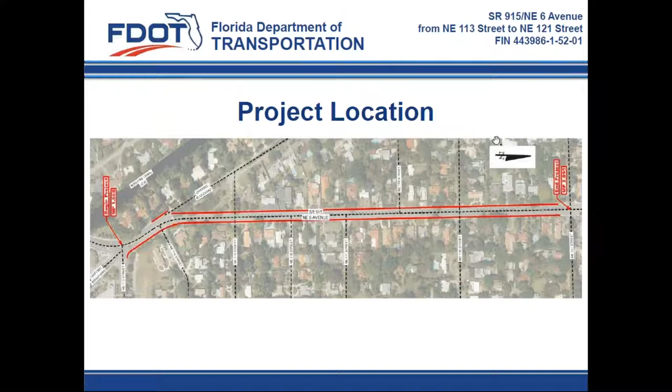A brief background of this project: In April 2018, the Village of Biscayne Park's previous commission and manager requested FDOT to add sidewalk within this corridor. A study was initiated which determined the feasibility of this project. Back in 2019, the Village of Biscayne Park also requested to upgrade the deficient lighting system along the corridor. FDOT approved this scope and determined that they will only cover the cost of conventional lighting, and the village is to cover the cost difference for decorative lighting.

As a result of all the previous coordination and requests, the scope of the project includes new sidewalk along both sides of the road within FDOT right-of-way, new lighting system to replace the current deficient one, incidental drainage improvements due to the sidewalk addition, the upgrade of crosswalks and pedestrian signalization features at the Northeast 113th Street intersection, and also landscape modifications within the FDOT right-of-way.

Some relevant dates and milestones for this project: the design was initiated in November 2019. The letting date is scheduled for July 2021. The construction start date is scheduled for November 2021. The end of construction date is scheduled for June 2022. And the cost of construction is approximately $2.6 million, which includes the cost difference for decorative lighting.

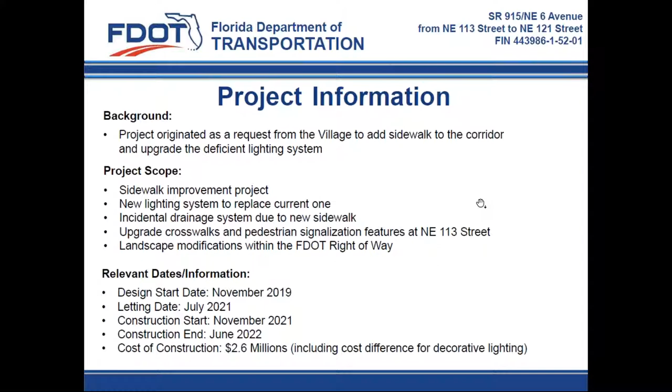Our project will maintain decorative driveways. The new sidewalk will connect to the existing decorative driveways at the approaches of the driveways.

There are also several landscape encroachments within the FDOT right-of-way. Our team, led by the FDOT Property Management Office, will coordinate with each of the individual property owners for the relocation or removal of these encroachments.

License agreements also will be required at some properties where the proposed back-of sidewalk or driveway needs to be harmonized. Our right-of-way office team will also coordinate with the residents that require to sign these license agreements.

Our maintenance of traffic was designed to avoid any nighttime work and is going to provide at least one travel lane open in each direction at all times. Access to properties will remain. Any temporary driveway impact due to drainage installation will be closely coordinated with the property owner during construction.

And finally, the FDOT is to enter into a locally funded agreement with the Village of Biscayne Park to cover the cost difference of $400,000 for decorative lighting. Otherwise, conventional lighting will be provided and fully covered by the FDOT. The decorative lighting was closely coordinated with the Village Public Works Office since the project design started.

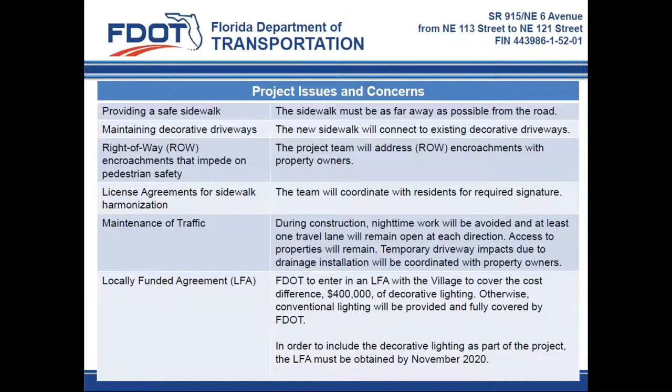With this, Mehar, our lead roadway engineer, is going to go more into the technical portion of the project. Mehar?

Thank you, Hans. Hans has covered a lot of the things that I will be covering. However, I'm going to be focusing in and showing you guys from an aerial perspective the roadway improvements that will be proposed. As he mentioned, there's going to be some crosswalk improvements at 113th Street.

Currently, there's only one crosswalk along the south side of the intersection. As you can see here in the picture, we're adding crosswalks on all legs of the intersection, so that's definitely an improvement to the area. In addition, we're going to be adding new striping, and we're going to be adding ADA features such as the curb ramps and the pedestrian signals.

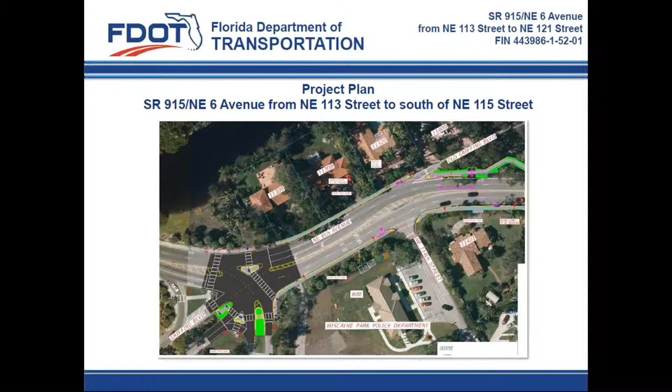As you see here in the light shaded gray on both sides of the roadway, we are proposing the sidewalk. For safety reasons, we're going to be placing the sidewalk as far back up against the right-of-way as possible.

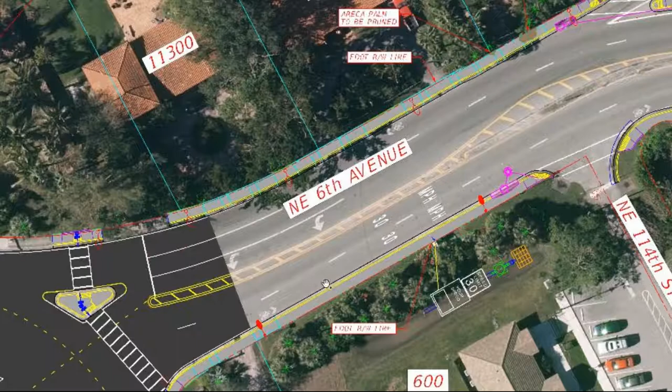As we go through the project, you will see different colored symbols that will show you different features of the roadway. For example, here on the right side, we have a roadway lighting feature that will be placed. On the other side of the roadway, you'll see another symbol that shows you a different kind of lighting feature, and we will cover that later on.

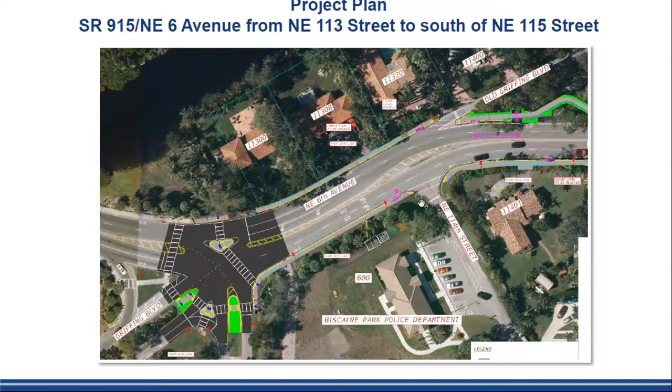We'll also show in a light purple color the drainage system that will be added to the project to mitigate any runoff because of this added sidewalk. As you see here, driveways were added at different locations of the project, obviously to maintain access to the properties.

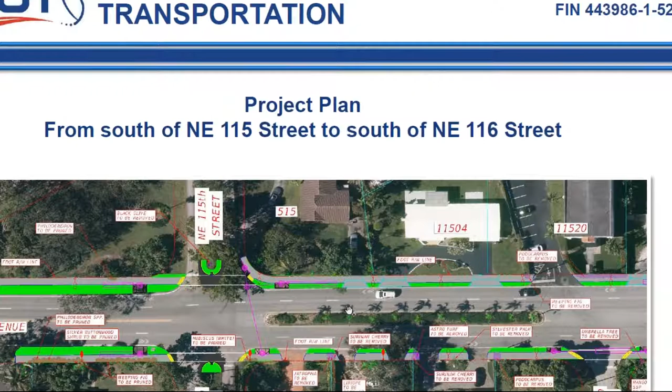At some locations where we have decorative driveways, we refrained from modifying or touching these driveways. Our approach was to change the profile along the sidewalk to tie down to the existing driveways where possible. Obviously, the driveways had to meet certain criteria, one of which was the ADA criteria. In some locations, such as this one here, you'll see a gray driveway, which means that you're getting a new concrete driveway that will be tying into your property and to your driveway.

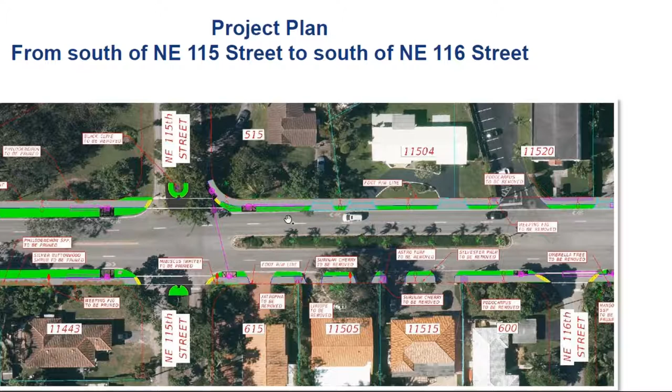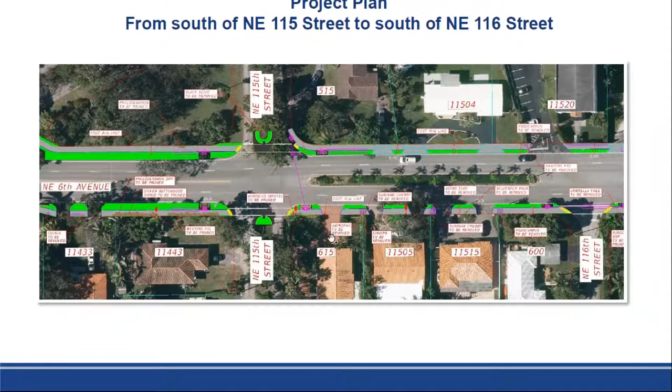As we go through the project also, please note that for safety reasons, we added a couple of pavement markings to remind drivers that this is a 30-mile-per-hour zone. We have placed one on the south side of the project, one just south of 119th, and one north of 119th intersection, and another one actually right at the end of the project.

Here's the 30-mile-per-hour pavement markings, again, to remind the drivers that this is a 30-mile-per-hour zone.

In addition to the sidewalk, we are placing a small swale, a 4-foot swale between the sidewalk and the roadway, to capture any runoff from the outside lanes and from the sidewalk and convey it into our system. A lot of these systems are small closed systems. They include French drain systems that will capture the water and convey it into the groundwater table.

And as we go through the project also, just to show you here, we're replacing the speed feedback sign, which is outdated as well.

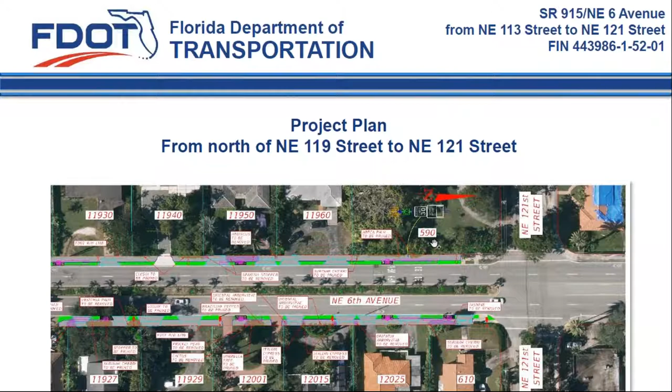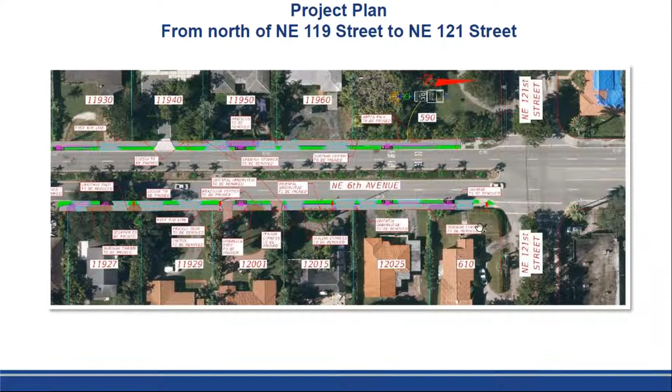The next slide is going to show you a visualization—we have a few visualization slides that show the daytime and nighttime feel of what the project's going to look like once it's completed.

Just south of 115th Street, we have the 6-foot sidewalk. A small portion of it has a curb and gutter adjacent to it, but as we go further into the project, the curb goes away, and we keep the flush feel to the project.

You also see a handicapped person in a wheelchair. That person is going to have access from the beginning of the project all the way to the end, with all the curb ramps we're adding.

In addition, next to the gentleman wearing the blue shirt, there's a decorative driveway that we are maintaining. The sidewalk will taper down, tie into that driveway, and pick back up on the other side.

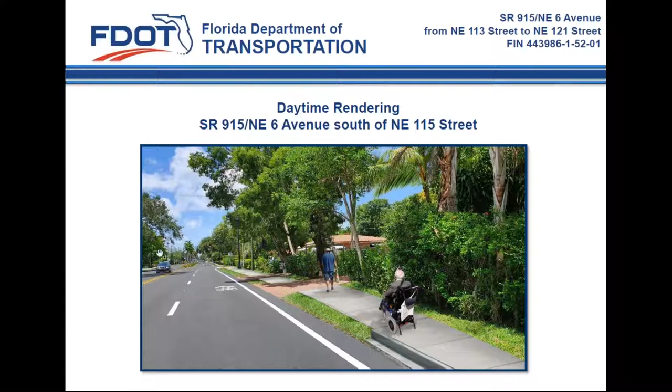You'll notice the different lights shown on both sides of the roadway. As we go to the next slide, you'll see the nighttime visualization—this is what it's going to look like during nighttime.

Let's keep in mind that these lights are meeting certain criteria as requested by the village. They also have to meet the DOT's criteria, obviously, and we'll get into more details about the lights later on.

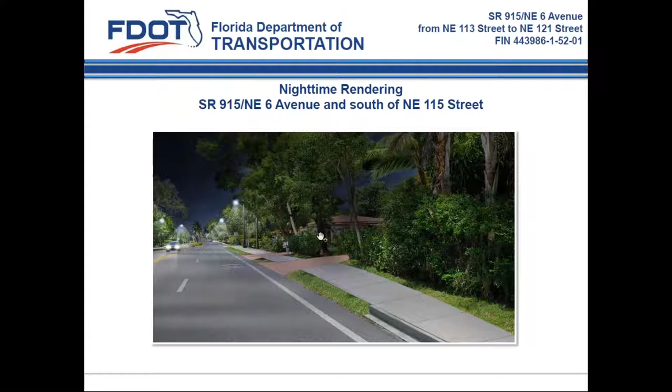In some areas, we will need, as Hans mentioned, license agreements to tie in. In other areas, we don't—it really depends on the property. And as Hans mentioned, you'll be contacted by the right-of-way folks when the time comes.

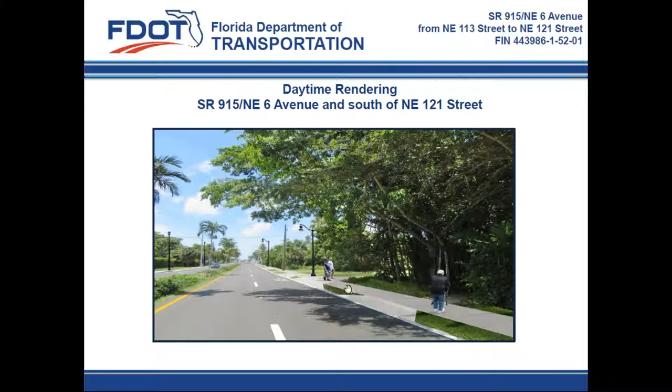As you see, there's a small swale on both sides. For clarity purposes, we didn't show the drainage in any of the pictures, just because it gets a little too complicated and too graphical to show.

As you see on the different sides of the street, there are different light poles. The reason for that is that on one side of the street you have overhead utilities, and on the other side you don't.

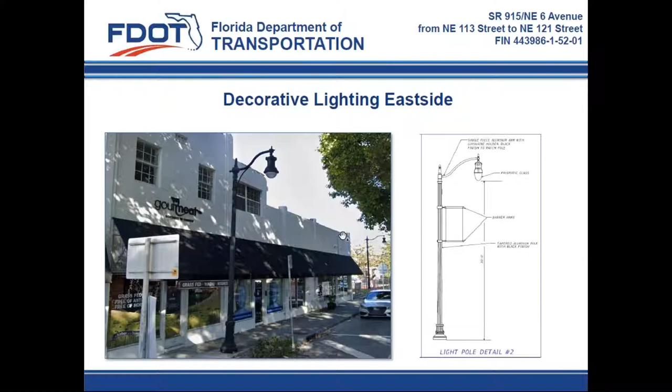The reason we chose this one on one side is that there's no overhead utilities. However, we chose the other one because of the overhead utilities, where we had to stay clear of them—as you see on the left side of the presentation, that light pole does have utilities over it. That's exactly the main reason why we used it.

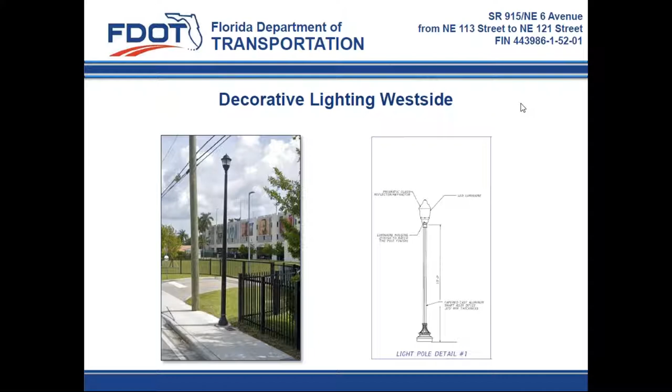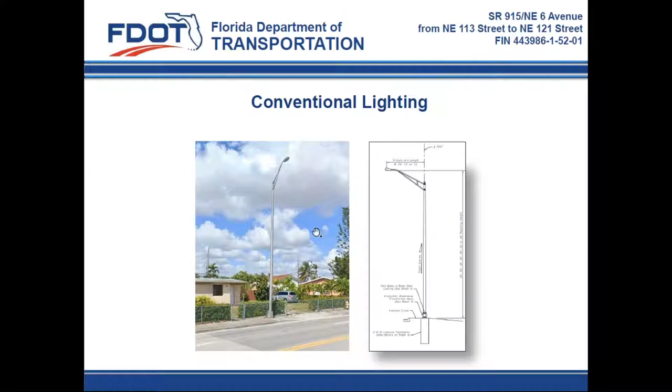If an LFA is not agreed on and not entered into, then we will be proposing the conventional lights, which you see throughout the city. This is a good example of what the conventional light will look like. And Rodolfo, I'll turn it back to you.

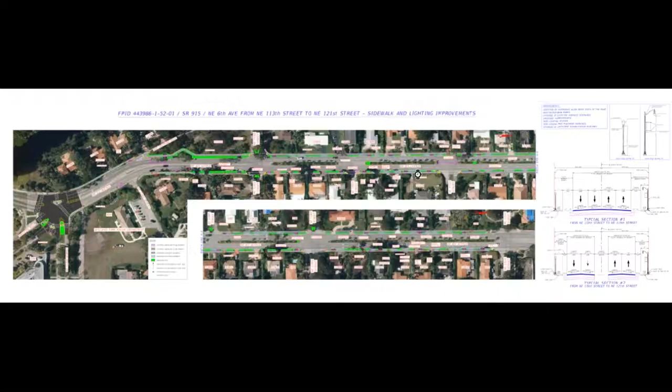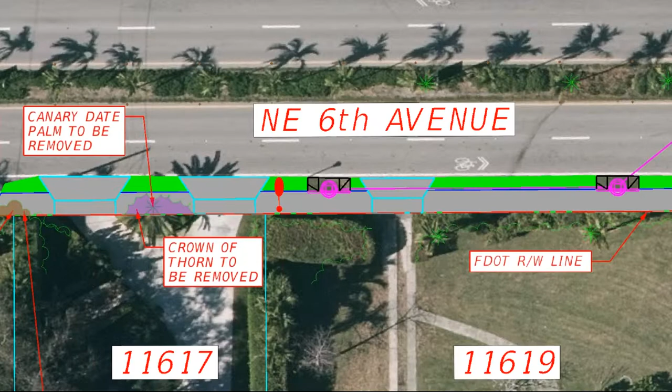Absolutely. I'm trying to look here—I'm going to jump down to something that's rather important regarding the rights of way. So you're now showing us that there are things in the right of way, that's your land, that has been encroached upon with plants, mailboxes, and other things. That right of way is 10 feet deep, although some residents are telling me their surveys indicate slightly otherwise. But regarding items in the right of way, now that you're aware of them, in some cases full-size trees, what is your right, obligation, or desire to remove those items—some of which have been there for decades—even if you don't move forward with the sidewalk, for which the right-of-way is most important? Because according to what you showed us at the beginning, the right-of-way has to be cleared to make the sidewalk safe, and the sidewalks have to be as far off the street as possible. So what is your right, obligation, and desire to remove things even if you don't put sidewalks in?

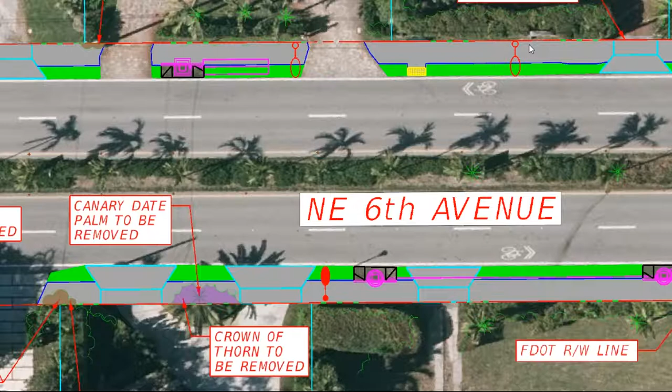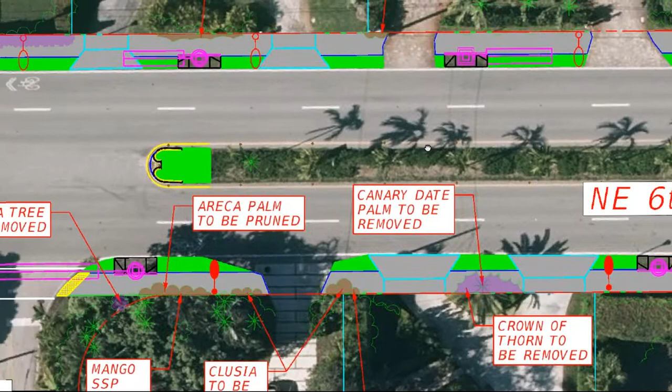Well, Mr. Kenny, there's several landscape issues blocking the clear sight for vehicles getting out of driveways, or trying to make a left or right turn from the side street onto Northeast 6th Avenue. In addition, we found that there are several palm trees or trees that act as a hazard to vehicles because they do not meet the clear zone criteria for above-ground objects.

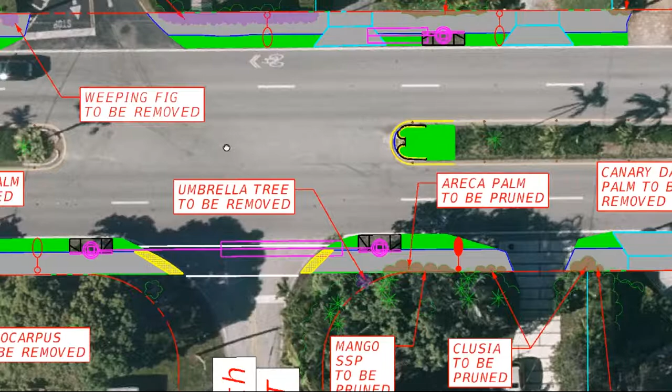With that said, that's the way we see it, but we have our right-of-way or property management officer on this meeting, and he can give you a better explanation of the process. We just want to give an opportunity for other folks that are waiting. So regarding those items in the right of way, tell me what's going to happen here, even if you don't put sidewalks in?

Yeah, let's bring in our right-of-way folks. They're available here. We have Mr. Jesus Alvarez, also our Mr. Jason Carpel and Henry Verdugo.

Seems that they're having trouble, Henry. It seems like your microphone is... Henry, can you hear me? Yes, can you hear me? Yes. Can you go ahead and assist with this question, please?

Well, normally, on the department's right of way, when we have encroachments there, and I'm not speaking in terms of landscaping, I'm speaking in terms of improvements, things like backflow preventers, irrigation systems, things of that nature that are in the department's right of way that are not placed by the department, have to be removed.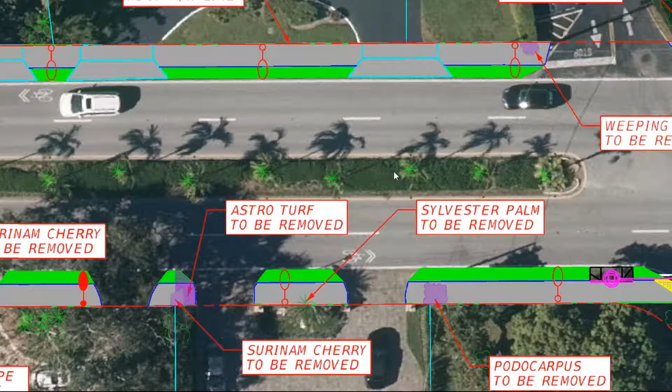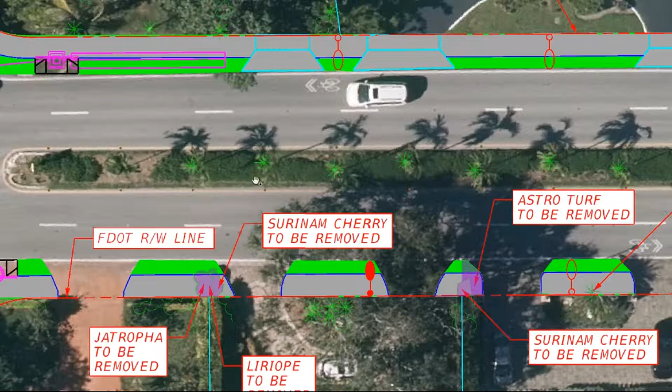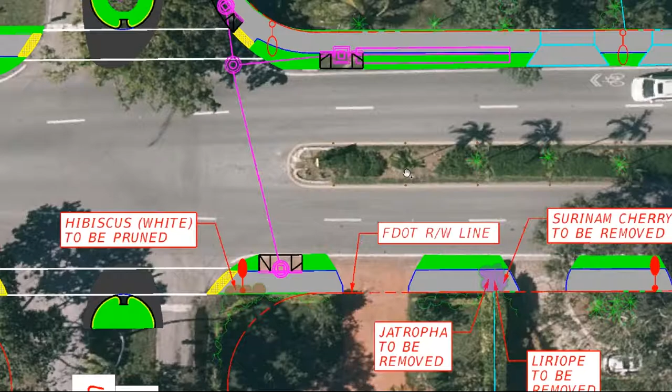With that said, it depends on the project. If the commissioner, or the vice mayor, I'm sorry I don't know who the gentleman was that was speaking, asked if we don't put sidewalks there, can those encroachments still remain? The short answer is normally the department will remove any encroachments that are not placed there by the department.

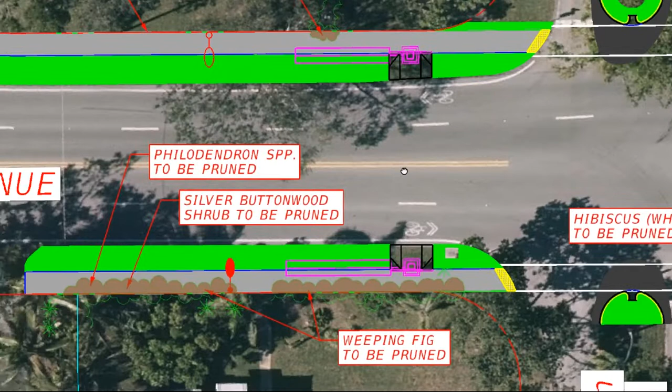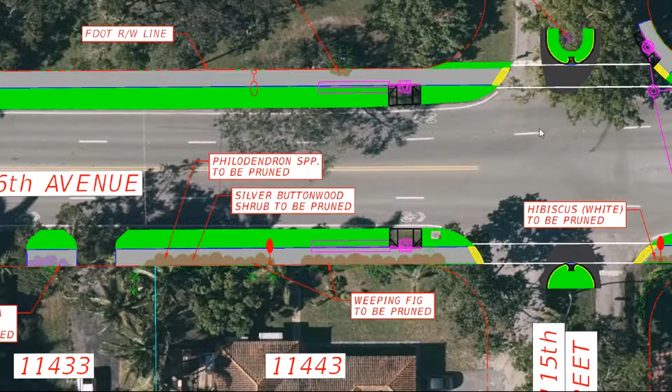Jesus, are you there? Jason, are you there? Do you want to add additional comments to that? Let's see if Jesus is trying to unmute himself. Let's just bear with him here. If we can unmute Jesus or Jason if they want to add information to this question. Jesus or Jason? Let's just bring it up real quick. You had it and then took it off. Hang on one second. Jesus? For some reason he's not unmuting himself there. Try one more time.

What we can do, Roman, also is the spreadsheet that was sent in with all the questions. I believe that was one of the questions that was in there. We can also do a follow-up to that. Absolutely, and once again, Vice Mayor, all your questions will be answered. We will be providing that for you. We just want to give an opportunity for other folks that are joining us here this evening.

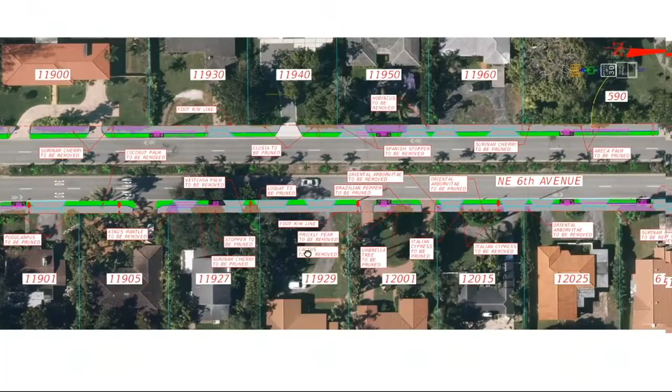We just received some more questions here. North of 121st Street, the sidewalk is not so invasive and far from the street with a green space in between. Why is the portion of Biscayne Park sidewalk on 6th Avenue so different from the south of 113th Street and north of 121st Street portions? Team?

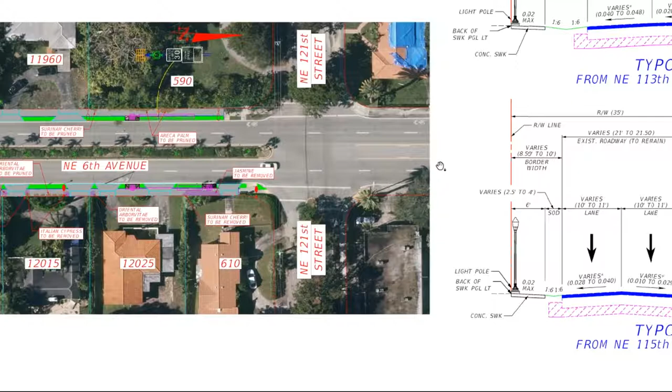Yes, as you can see, the typical section north of 121st Street is completely different. You have curb and gutter, and then sidewalk, so we're talking about a raised sidewalk. Our proposed improvements, and the way this project was scoped and programmed, was to provide flush sidewalks, as you can see on the typical section. So basically it's a completely different typical.

In order to provide curb and gutter and have raised sidewalk, as you can see north of 121st Street along Northeast 6th Avenue, the outside lanes will need to be reconstructed to promote positive drainage and convey the water along the gutter line. So it's a different scope. It will require more reconstruction. It will be more invasive.

Thank you, team. I'll proceed with another question. Why haven't different types of pavement been proposed to promote speed reduction in the area?

As for the pavement itself, there's no pavement that reduces speed. There are different features in the roadway we could place, however, we did take a look at that, and because of the speed of the road and the context classification of the roadway, we cannot place things like speed tables or rumble strips, none of that stuff.

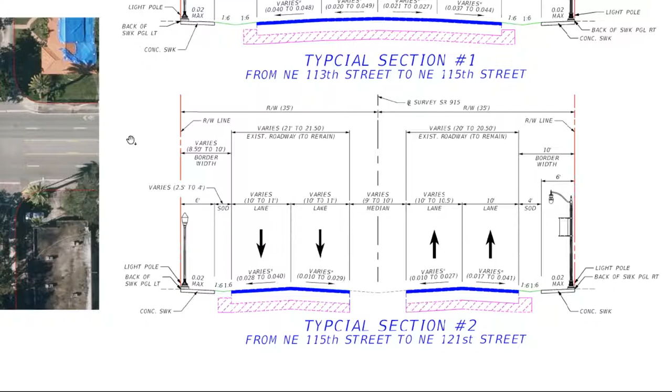However, we did look at where we could notify drivers of the speed limit and make them more aware of it, on both approaches to the village. That's why, as you see on the plan view, we're adding speed limit signs to remind drivers of the speed. We're also updating the speed feedback sign, which is very helpful. It always tells you what speed you're going at to remind you this is a 30-mile-per-hour zone, so don't go any faster than that.

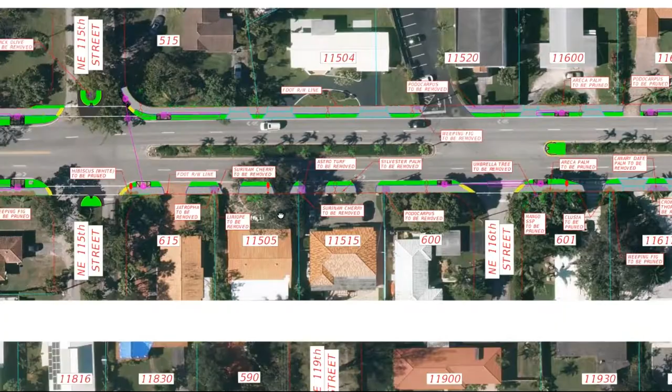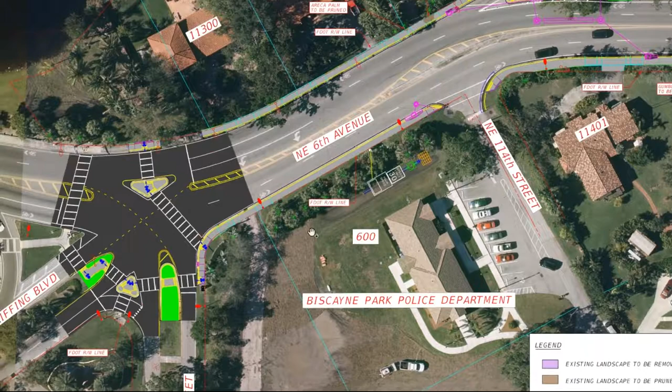Thank you, Mahir. Following up with another question here. Are there any ADA requirements governing State Road 915 that require sidewalks to be installed to provide accessibility from Miami Shores to North Miami?

Ideally, any state road should have a sidewalk path. It can be either a sidewalk or a shared use path. So in theory, yes, of course, this is an old road. We understand it has been there for a while, and it will be an opportunity to provide sidewalks.

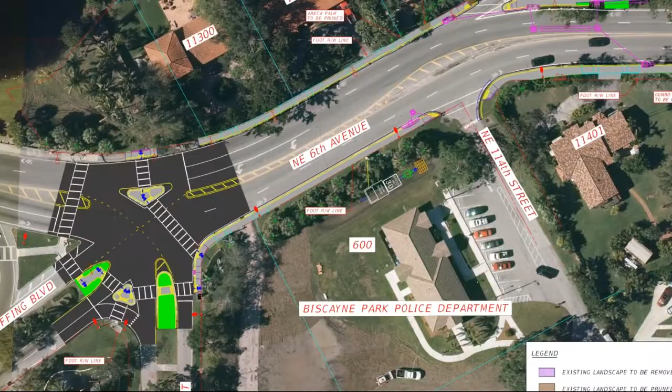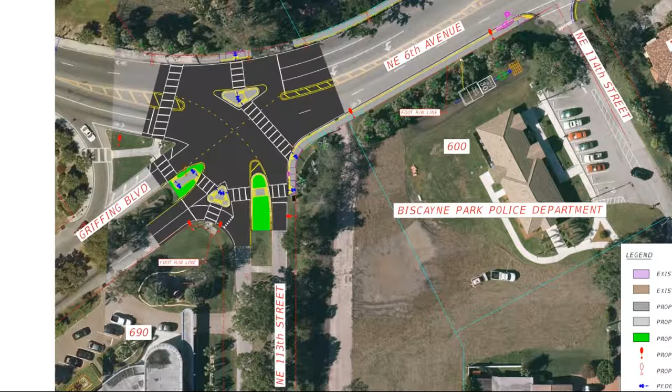The church near our property has a school on 6th Avenue for a block or two, right on the corner of 113th and 6th Avenue. Are we going to make that into a school zone? Will there be a sign up for a school zone? Team? We will look into it, and if it's a registered school, then yes, we will add signs for the school.

We plan on 115th Street and Northeast 6th Avenue. Are you planning to put a curb on corners so people making turns don't run into the swale area, for example on 115th Street and 6th Avenue? No, that is not part of the scope. You're talking about adding curbs within the median or on the outside? On the outside. Yeah, that is not part of the plan, no.

Okay, let's see a couple more. Could FDOT join forces with FPL to put the electrical lines on 6th Avenue underground? That way we can keep the lights we already have. Also, if we're placing new lighting, shouldn't it be replaced with the same type we have? If you're not going to do this, can we keep the lighting we have instead of paying extra for decorative lighting, because the lighting on 6th Avenue looks pretty good.

Yeah. Chris, you want to chime in on the lighting? Yeah, so currently the lighting that is out there, per reports reviewed during scoping, has several deficiencies. There were light poles damaged due to Hurricane Irma. The existing lighting has National Electrical Code safety violations due to the service voltage. The existing lighting was built to a different illumination criteria than today's, so it's already deficient. What we've proposed now is a current decorative lighting system that meets all applicable FDOT as well as national standards.

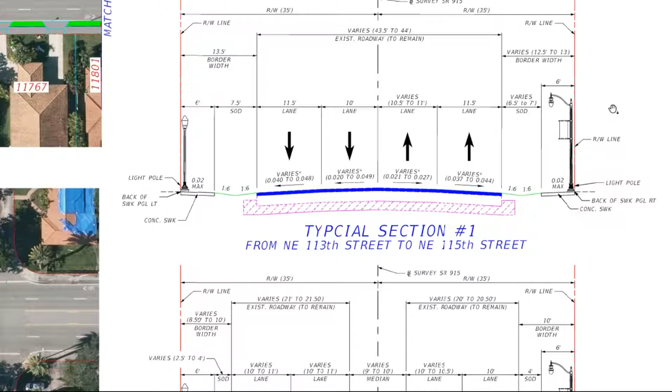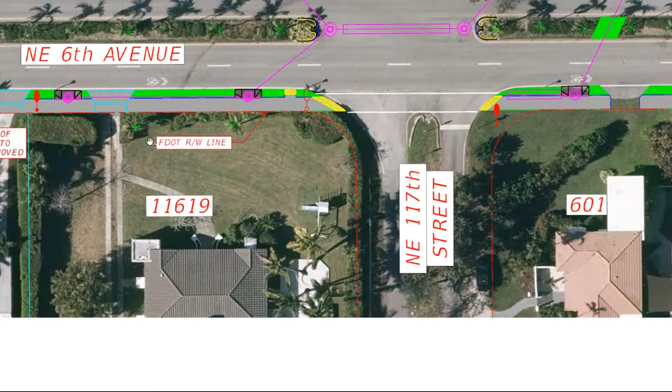Thank you, Mahir. I'd like to revisit a question. We have the address of a person questioning the drainage and sidewalk and how it would impact the hedge, and if it would damage it. The property is listed at 11619 Northeast 6th Avenue. So I was wondering if my hedge will be damaged due to this project, and how should I go about it. This hedge protects and separates us from this busy street and has been on our property for over 30 years. Therefore, it is grandfathered in.

Well, based on our evaluation and analysis, it seems that your hedge is outside the DOT right-of-way. Shay, can you confirm that, please? Let me just open up Shay. She's there. Hi, yes. At this location, the hedge that is there is outside of the right-of-way. It's actually behind a chain link fence that appears also to be at the right-of-way line, behind the right-of-way. So at this particular location, we have not identified any impacts, any landscape impacts.

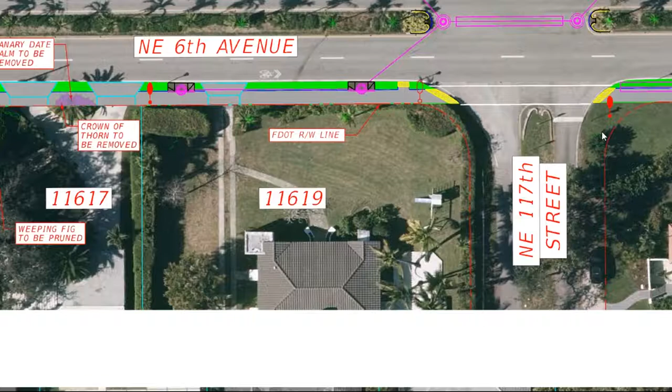If you could provide your address, your email, and your comment. Sure, my name is Mike Oliva. My wife Melanie and I live at 590 Northeast 121st Street. That's our swale with all the signs in it.

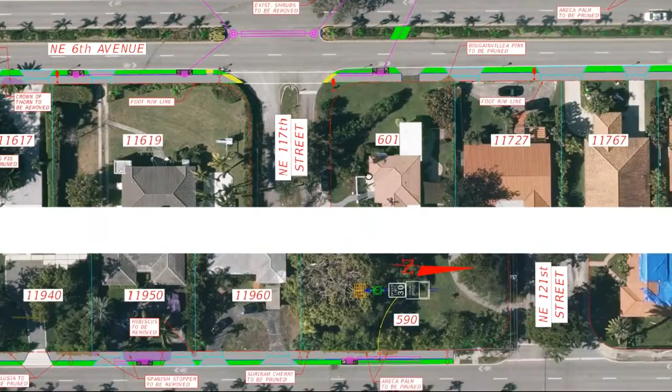I appreciate you made a note of that and had a look. Thank you very much, I appreciate your consideration there. I just wanted to take a second to thank State Senator Pizzo and the Biscayne Park Commissioners who are taking part in this meeting with us today. We as residents of 6th Avenue obviously have a lot of concerns regarding this project. So I wanted to thank the folks from FDOT as well for taking the time to hear us out and work with us on this.

I also wanted to take a moment to acknowledge and thank my neighbor, Howard Goldman, for taking the time to organize us and put us all together in a group. We as an association now of Biscayne Park 6th Avenue residents feel like we have a more unified voice in this process. I wanted to reiterate the comments that he made and say that we as a group stand fully behind what he said.

We are interested in sidewalks, but we want them under terms that we feel would be beneficial to not just the residents of 6th Avenue, but everyone in Biscayne Park. We need roadways that enhance the beauty of our community. We are a bird sanctuary, we are a tree sanctuary, and it's important to us that we maintain the aesthetic of our park, and if anything, use this project to enhance that beauty, including having a study done to see about removing one lane of traffic in each flow of 6th Avenue.

Specifically, because I can tell you in the 6 years that my wife and I have lived here, we've had no end of traffic accidents in front of our house. I remember for the first few months that we lived here, I was out there with a broom every few days, brooming up glass from cars that had smashed up. We've had cars wreck against trees in our home and do no end of damage, and we've seen cars flip over. This street is a danger to all of us because people do not remotely respect the speed limit.

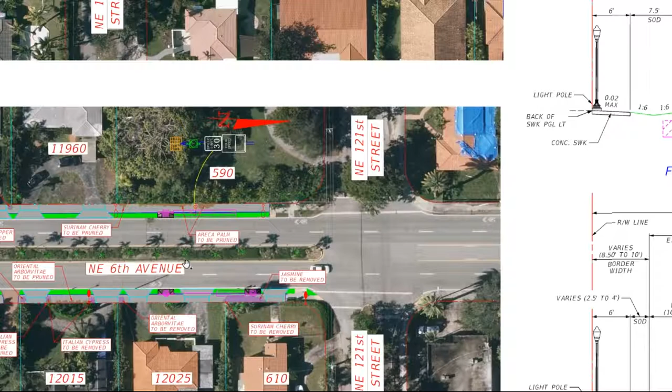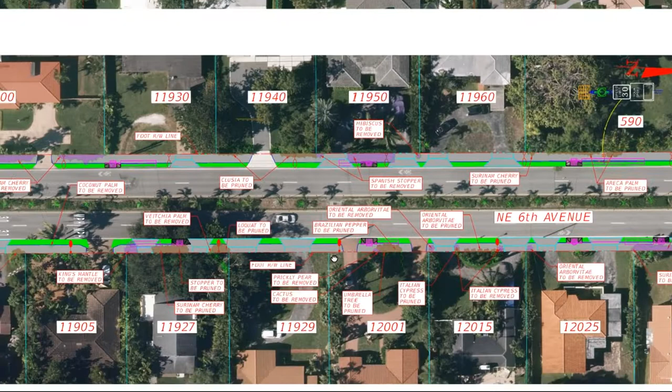I'm one of the members of the group, the 6th Avenue group. I support 90% of what was said. I was under the understanding that we were only really for sidewalks if it was entertained in a different way than what you're presenting right now. So basically, I'm pretty much against sidewalks, but I'm willing to deal with them if it's presented in a way that preserves the beauty of Biscayne Park and doesn't endanger me any further.

I do have another comment. Somebody earlier, I think Barbara Kuehl, had suggested removing the medians, and you were saying how that couldn't be done because they were a deterrent.

Both times my property was slammed into by a car, it was from a car going south on the other side of the street, two different times, and drove right over the median and slammed into my property, one right into my house. So I don't think the median is a very big buffer, but that's just a side comment.

I really just wanted the commission to hear me reiterate the things I have told them 8,000 times, that I want to retain Biscayne Park's small town feel. I don't really think the sidewalks serve that. I don't believe there is enough foot traffic to warrant that, being that we are a residential neighborhood and we don't get a lot of that. And although I support everything else that my group said, I thank you for listening to me, because it's a rough subject for me.

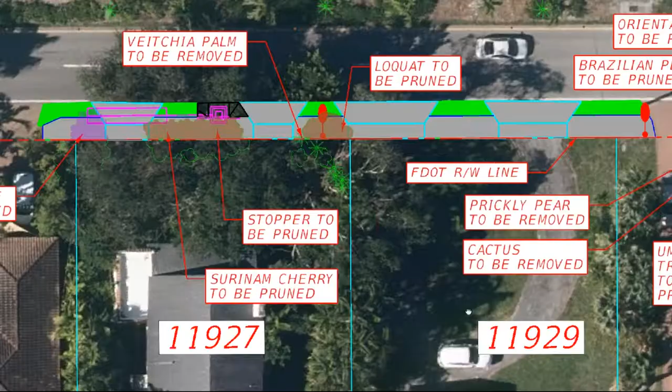Daniel Carbonera, 12001 Northeast 6th Avenue. My email is danielcarbonera72@gmail.com. I want to reiterate, I support what Howard presented, and I would like to see a little bit of transparency on the previous request of the Commission from Biscayne Park, because it seems something popped up from 2018, and now in 2020 we are kind of a victim of something we never discussed or saw until a few weeks ago, when Commissioner McDonald was able to bring attention to it. So we would like to participate because we are living here, we are part of the community, and we have the first interest in that. So I hope in the future we can move in a more proactive way.

One of the questions I was asking is whether, in the normal procedure, FDOT can move forward considering going for one-lane traffic, or whether it will be required to stop this project and start a brand new one if you go for this major modification.

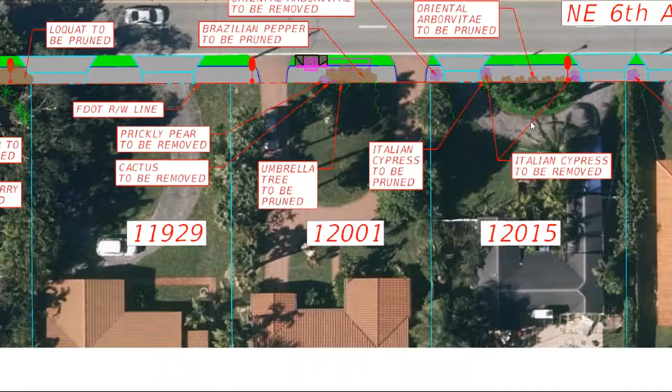Okay, thank you, team. We received a question here from one of the residents. Our property is the only one with an existing sidewalk. The address is 11905 Northeast 6th Avenue. Does anyone know why our property has a sidewalk? And can we get a transversal section of our property to see the detail of elevation and possible water flooding from the street to our property?

Rodolfo, I'm not sure if there's a question in there, but to answer, we don't know why that portion of the sidewalk is there. It's a very short segment. It is substandard. It doesn't really start from any particular point or end at any particular point, it's just random. The project proposes to replace that portion of the sidewalk as shown here. This is the private property at 11905, and this is the location right in front of them where we show in gray a new sidewalk.

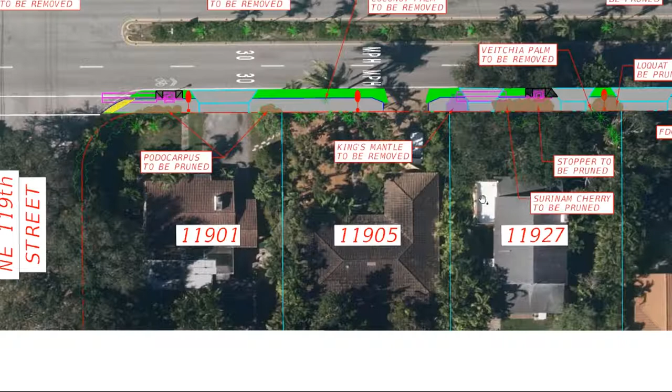So Mr. Ross? Yes. Provide your address, your email, and your comment. Thank you, my name is Chuck Ross. I live at 11166 Griffin Boulevard. My email address is chuck.carosspa@gmail.com.

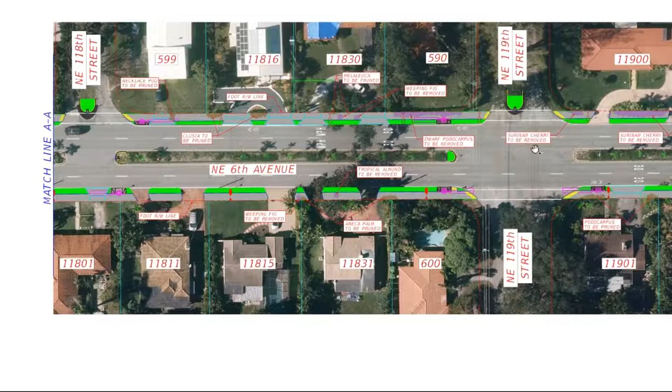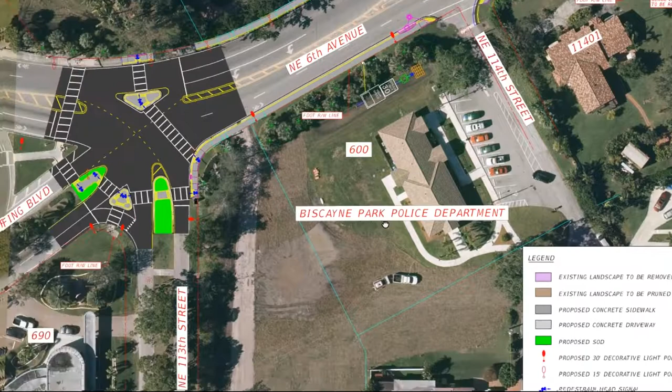I want to thank everyone, I want to thank you all, I want to thank Senator Pizzo and our commissioners. I want to echo - I'm going to agree with Howard Goldman and Mike Oliva, who spoke earlier, and Nancy Davis and Danielle Carbonera.

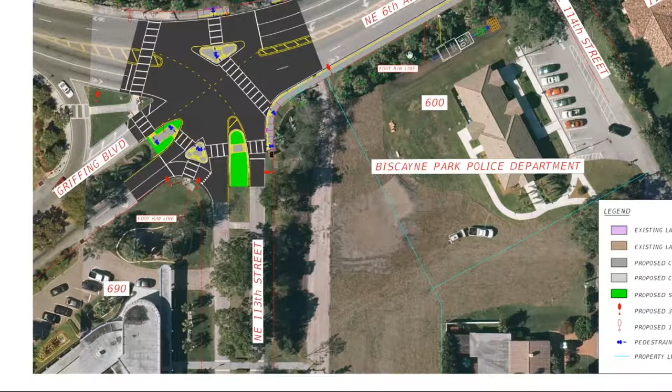We have some serious concerns about this project, one of which is the lack of area on the swale to accommodate what you're trying to do. In fact, what I understand is that some of the swales are less than 10 feet, and it will be a 6-foot sidewalk and a 4-foot buffer. If the swales don't accommodate that, I'm wondering how you're going to deal with it.

The second thing is, I am very concerned that you didn't do a traffic study, now that I find that out tonight. Someone mentioned this was a historic median in the middle of 6th Avenue - that's news to me, I didn't know that. And there was always a mention from our Vice Mayor Matt Kennedy that the beginning of this project, the initiation of this project, was not brought to the public. That's clear. So maybe you could answer those questions. Thank you very much.

Okay, hello Mr. Ross. Let me see - the first question you had was about the swale. That is correct, it's a 4-foot swale. That's what we're left with since the border width is 10 feet. The sidewalk has to be 6 feet to meet FDOT criteria. The 4-foot swale was taken into account when we did the drainage analysis, and that's what we used to design our drainage system as well.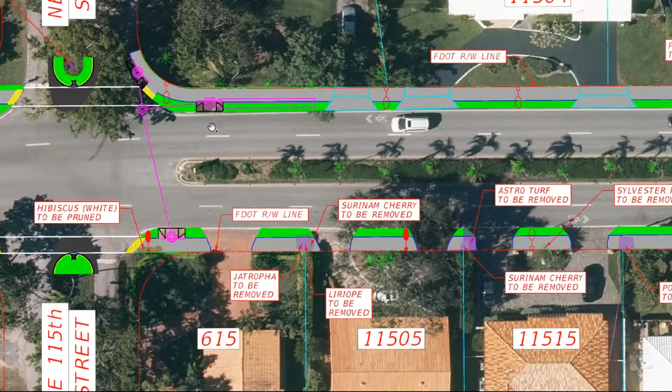Let me add something to what Mahir said regarding Mr. Ross' concern about the narrow swale. The swale at most of the project, north of 115th Street to 121st, will end up being 4 feet in order to accommodate a 6-foot sidewalk. But keep in mind we are adding inlets at the low points and segments of French drain. All these inlets and French drain systems will take care of the additional runoff, and we'll make that narrow swale work. This has been evaluated and modeled — we've done an engineering study in order to size these French drains and accommodate these narrow swales.

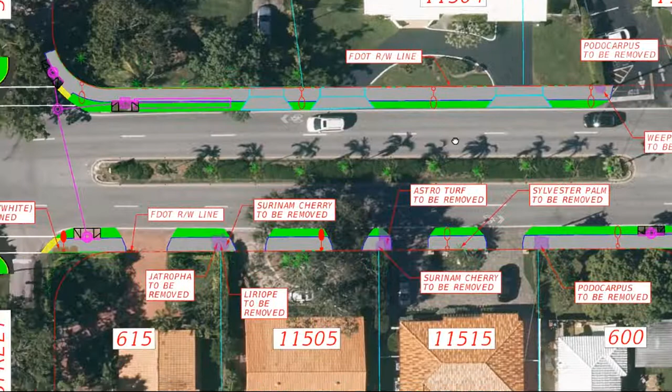1107 Northeast 118th Street, FLDK@AOL.com. Several comments and questions. First of all, I think it's unconscionable that you're considering not replacing our current residential scale lighting with the same scale lighting. We have basically a property right of 30 years or so with residential scale lighting. You should be replacing it at no cost to the village. That's comment one.

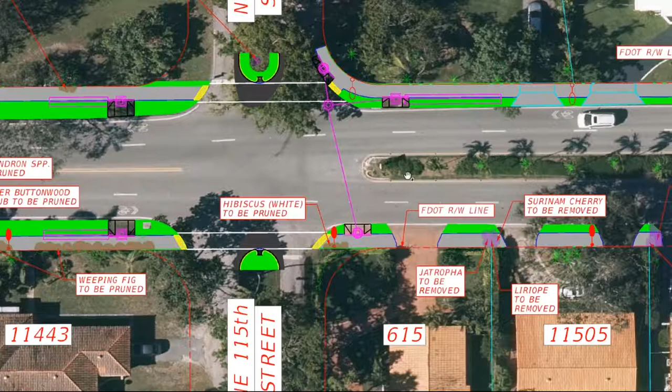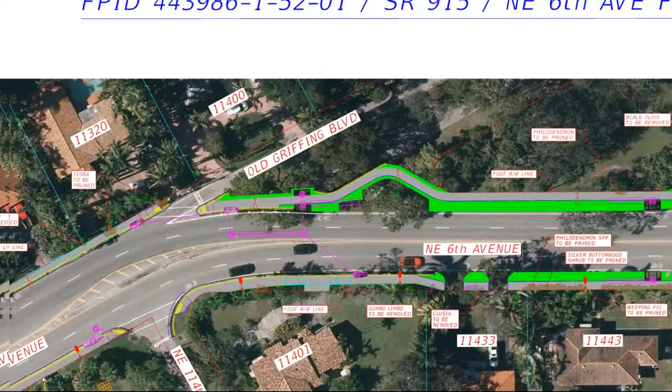There are several — there's a new crosswalk at 113th and 6th Avenue, one emanating from directly in front of our new village entrance sign, where you placed a very lovely crosswalk signal. I don't believe that crosswalk, the shorter one I'll call it, is at all necessary. It's redundant. It can be taken out of there and you'll eliminate the problem of having this pole in front of our brand new sign.

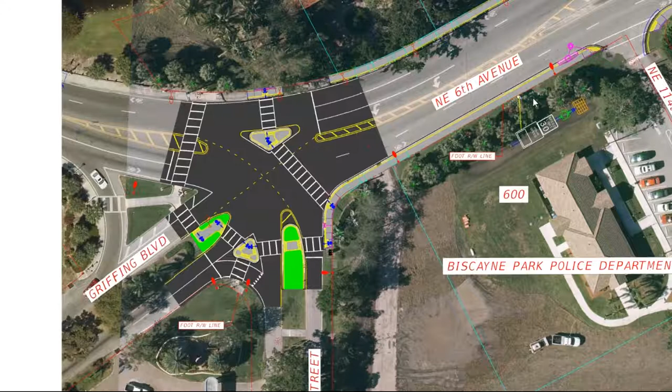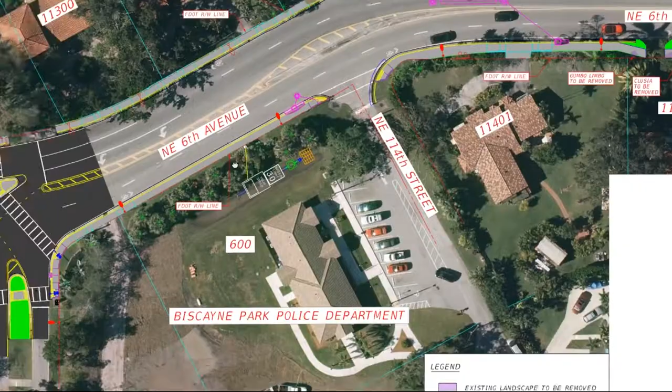There are some situations where trees are impacted. One at southbound Griffing Boulevard at 6th Avenue, there's a very large mahogany tree there that some serious investigation needs to be done as to whether the proposed sidewalk is going to negatively impact it too much. There's also a tree being removed at 115th Street and Northeast 6th on the west side. I would question and ask you to see if that can be reconsidered.

Give me just one moment to go through my notes.

So if one of the existing wooden poles servicing telephone, electric, or service lines ends up in the middle of your new sidewalk, what happens with that pole? Who pays for it? How does it get moved? I'd actually like an answer for that. If one ends up in the middle of your sidewalk, what do you do?

It will remain there, sir. Really, in the middle of the new sidewalk? No, based on our design we will have sufficient clear width with the poles in the middle of the sidewalk, correct? Okay, so we meet the required clear width for utility poles. The utility poles are going to remain in place. So you cannot move them. So you actually know the facts. That's it. Okay, all right.

I also want to tag on to the reduction to 1 lane situation. I would like my village commission to look into that process and possibly go through with it.

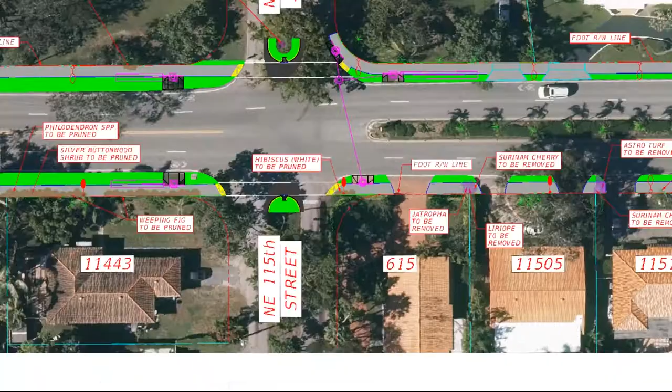11505 Northeast 6th Avenue. She says, I see a light being placed right in the canopy of our native oak tree. The sidewalk would be right against the tree trunk. How would this all be installed without damage?

Team? Yes, can you allow Shay to talk, please, so she can explain, because we have a special system to avoid encroaching into the tree roots. Yeah, Shay, go ahead.

Correct. So what we've done, and this is a great instance here with the live oak, where the trunk of the tree is just outside of the right of way, yet we know that the root system is well within the right of way, we have designed a special detail for a ramping system that allows the sidewalk to be ramped over. So we're not excavating down into the existing grade, we're not damaging the root system of that tree, and essentially it's ramping over the existing earth there. And I believe the light pole, the height, Chris, you could speak to the height of the light pole, and we're confirming that if we have to do any pruning, it will be selective pruning to the canopy to allow for the light pole to be installed at that location.

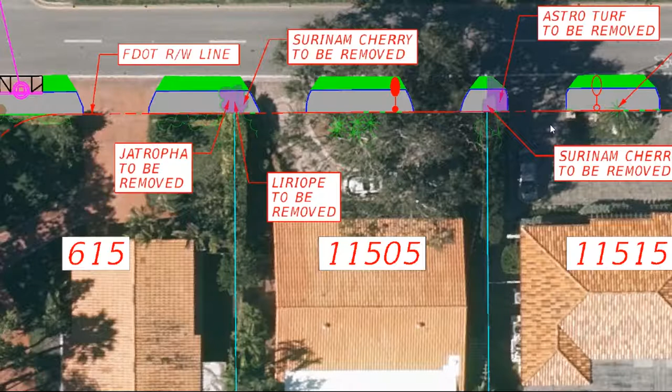So we're going to open up to Mr. David Raymond, who has been unmuted here for some time. Mr. David, you're unmuted, go ahead and provide your address and email. Hi, this is David Raymond, go ahead sir. 11520 Northeast 9th Avenue. Email address is obi1@bellsouth.net.

I want to thank all of you for being on the call, and for the hard work FDOT has done in this process. I don't live on 6th Avenue, but I do support the vision that Howard and his fellow residents of 6th laid forward. Whatever happens there, people who don't live on 6th Avenue shouldn't have the same weight as the people who live on 6th - it's their front door. I'd hope our town and commission would defer to them on what could happen. My specific question is, having formerly been a state employee and knowing how your budget process works, what is the time frame if we decided to change something here? Your deadline isn't until next year - are you on a multi-year budget where you have money for this? What would be the deadline for our village to get back with you and say here's what we want, here's what we don't want, go back and rework the plans? That's the time frame I'm looking for.

Right now, the project budget is scheduled for both design and construction, as shown in the presentation earlier. Construction is anticipated to start in 2022. Depending on the village's vision or resolution on this corridor - would the village be willing to seek one lane with a bike lane? That's a completely different scope, and it turns into a planning process. If the project moves forward as a sidewalk project, the design and construction schedule stays as is.